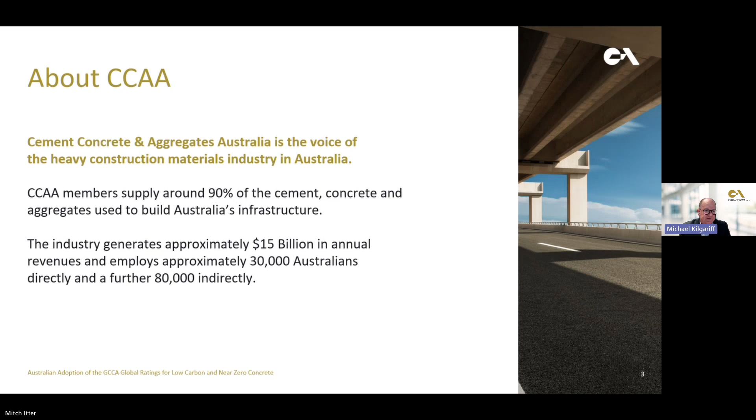So just a quick overview of our members. Of course, many of you would know the foundation members of CCAA. However, we have a number of other members that many of you would also be familiar with, largely covering about 90% of the industry in Australia. So at this point, I'd like to hand over to Di to undertake the formal launch of the Australian Adoption Guide.

Thank you, Michael. It's a pleasure to be here today. We're delighted to officially launch the Australian adoption of the GCCA Global Ratings for Low Carbon and Near Zero Concrete. We have released a guide today. It'll be available on our website immediately following the launch. And we thank you for all participating on this important day. This represents an industry-led step supporting Australia's transition to low carbon construction and net zero by 2050.

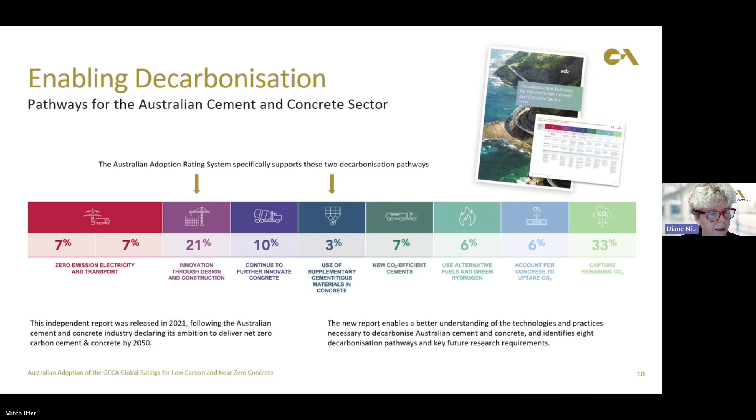This is an important enabling system for our Pathways report, which Michael talked about earlier. It was released in 2021. It was developed with the Cement Industry Federation, ourselves, and also through support by SmartCrete CRC and RACE for 2030 CRC. And we acknowledge and thank them for their involvement. There are 8 pathways in our roadmap, and this one actually relates to the design and construction pathway, and also the use of supplementary cementitious materials, which is, of course, a key enabler and critical to manufacturing lower carbon concretes.

Then late in 2024, we further expanded on that Pathways report by co-releasing with CIF an industry decarb facilitation plan. I would encourage anybody who hasn't had the opportunity to review that facilitation plan in detail to find that on our website, because it gives a really good explanation of how the pathways can be enabled and implemented in the market in practical ways.

The industry objectives there, the area of focus. Of course, this all relates to making the procurement of lower carbon concretes simpler, easier, and more transparent. And we look forward to the rating system being implemented and applied in the Australian market in the coming months. And we will continue to work with all our demand stakeholders there. So it's a great enabling tool for the low carbon concretes, which everybody knows are currently available and will continue to be available into the future.

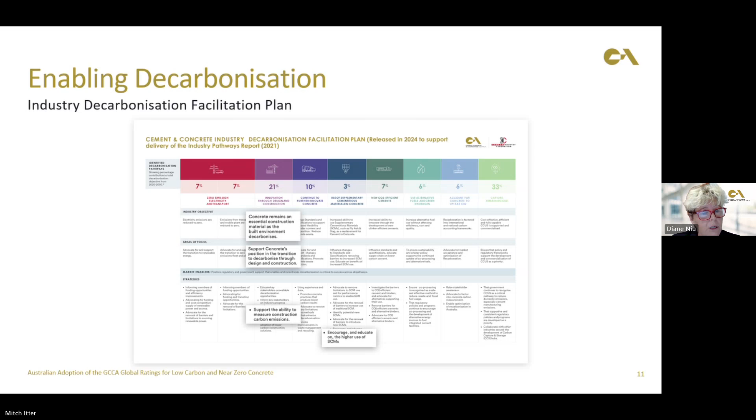So the purpose, why we've done this, what are these designed to achieve, is to support low carbon procurement, facilitate environmental reporting, and enable fair product comparison. I'm going to pick up those 3 points on the next slide, and they're not in bold, but maybe it should be, because it's also designed to overcome the problem of lots of different low carbon definitions. Essentially, we foresaw a proliferation of low carbon definitions that was just going to confuse the marketplace.

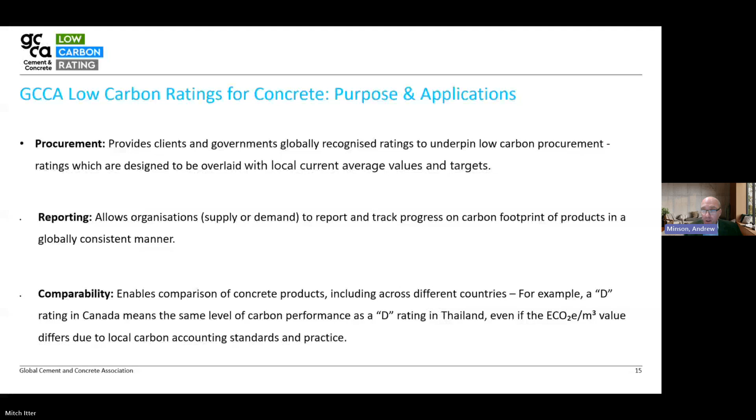But for those countries where the transformation is required, our rating system actually is like a Babel fish, if you know that; it actually translates it. So a D in Canada will be a D in Thailand, even though they use completely different EPD systems. And so that comparability is proving quite useful to clients, contractors who are operating globally, and enabling governments to compare what they're doing.

Those 3 points are picked up on the next slide, Mitch. And in addition to those 3 points on the far left, there just is a communication. The marketing and the promotion is a fourth reason to have this. That's what these ratings facilitate. And you can see some of the graphics we've got. And I'll come back to talking about our ratings in a bit more detail right at the end.

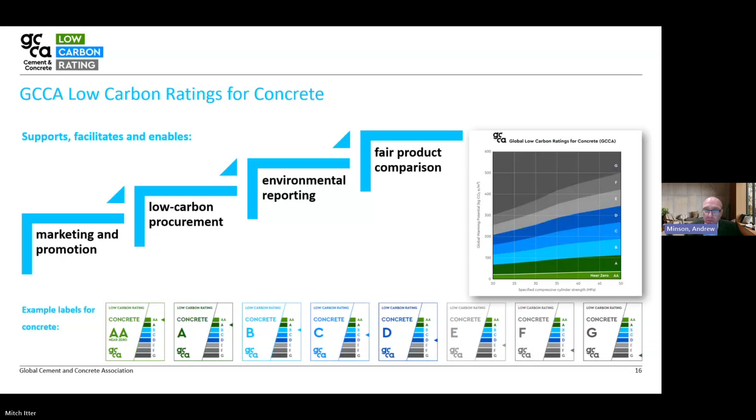On the right-hand side, we've got example labels at the bottom. And countries are completely at their discretion whether they use those or not, but we provide them if they want to be used. We'll come back to the ratings themselves, but first of all, I just want to talk a little bit about the process of how we've got to these ratings.

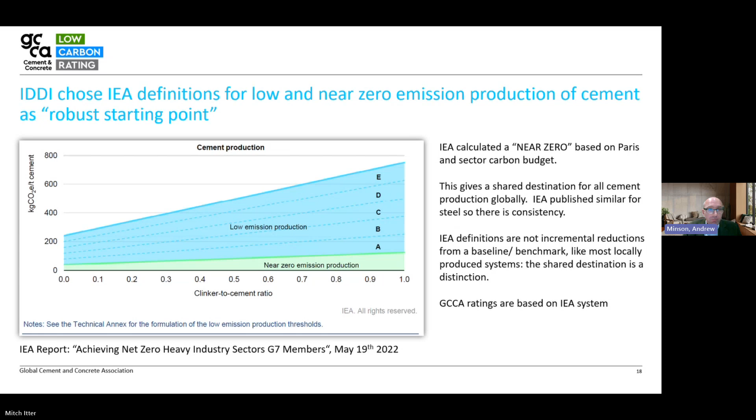It may be in the Australian market an obvious thing, but elsewhere in the globe, that's not necessarily an obvious thing. And so we're very pleased that we've been able to deliver something using EPDs that have got a track record of that credibility and transparency.

Earlier, I mentioned this balance between global and local. So it's a global system. It meets the needs of governments, international companies, and those who relate to international companies. And then there's this local aspect. So local, and Di's mentioned it. You can change the horizontal axis to be whatever strengths you typically use. If you use cube strength rather than cylinder strength, you've got the ability to set targets and thresholds in procurement.

And finally, there's this point about, we were very aware that at country level, state level, even local level, various schemes were emerging in terms of ratings. And that was obviously problematic. And so therefore we can develop the consistency through our ratings.

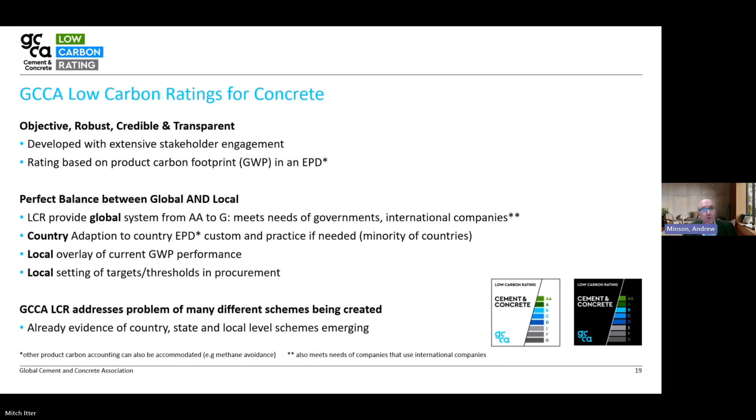So if we go on to the next slide, I've got 2 slides here on progress. We've got government adoption, private sector adoption, and then finally on the next slide, we're going to come on to standards. In terms of government adoption, we work very much with these multilateral forums. I've already introduced you to one. There's half a dozen others, would you believe, that we're working with to enable governments at that multilateral level to understand what these ratings are. And many of those organizations are calling for harmonization because these governments want to be able to do things consistently with their counterparts.

In terms of national associations, the first one that launched was way back in February now. Germany, the VDZ, the Cement Association there, launched their cement carbon class. And I'll just have one slide on that right at the end, just to mention what the cement ratings are.

In terms of the private sector adoption, the early adoption, just quickly on this. Concrete Zero, you may have heard of them. They've recognized it. We're working with the First Movers Coalition. The Concrete Sustainability Council is that 3rd bullet point. We're doing a pilot with them at the moment in LATAM, and that's going to be launched in January. The ICI is a German development agency. They've got a BEAT assessment method, that's building energy assessment tool, and they're using our rating system embedded in that. And we're in discussions with LEED. I know you've got your Australian Green Building Council system.

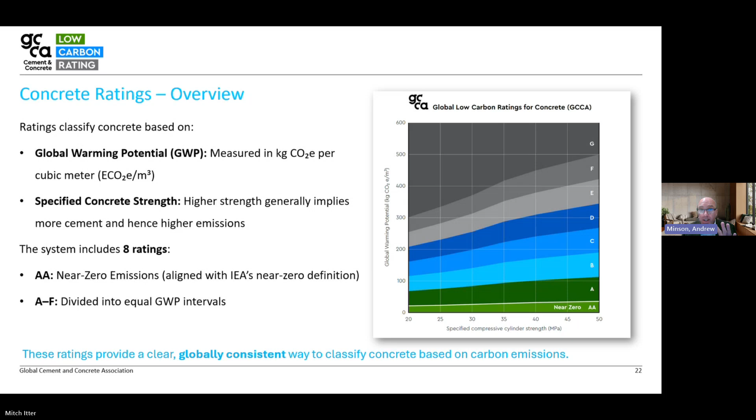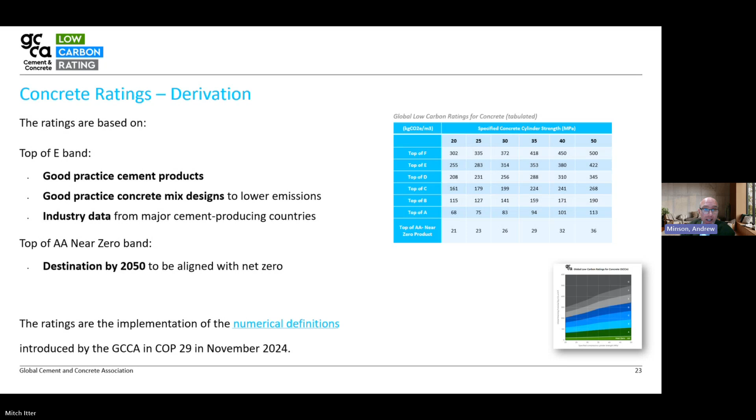Now, if you go on to the next slide, I won't go through the detail here, but if we just look at the top of the AA band at the bottom, the destination of 2050, it's aligned with net zero. I haven't got time here to explain how we've done that, but you can see at the bottom there, we launched these as definitions in 2024, and we've got all of that available on our website that you can read in detail if you want to look at how that's been derived.

Mitch, only 2 more slides to go.

I just want to mention the cement carbon class. So we've got these concrete ratings you've seen. We've also got cement ratings, and the German government and the German Cement Association, VDZ, they developed, would you believe, completely in parallel, but fully aligned, the identical system that we had come up with. And so this is the first which has been implemented, which fully aligns with us.

And even my 1 year of German at high school in Brisbane makes me realize that klimafreundlich is climate friendly. So what they're saying in Germany is they aren't using the E and the F. They have determined that ABCD and the near zero count as climate friendly. And so this highlights the point that the ratings are static over time and static over space, but the target and what's defined as low carbon varies. So in Germany, you have to be D or better to be climate friendly.

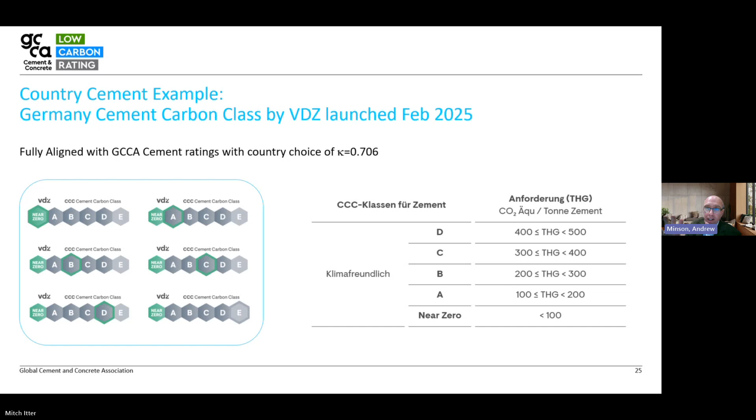And the proliferation of concrete ratings, where concrete's even more local than cement, meant that in some big cities, you could have different availability of low carbon concretes in the north and the south, and you'd end up with different ratings changing over time, changing over space, and there being a proliferation and confusion for everyone in the value chain. So to have these static global ratings constant over time gives that consistency.

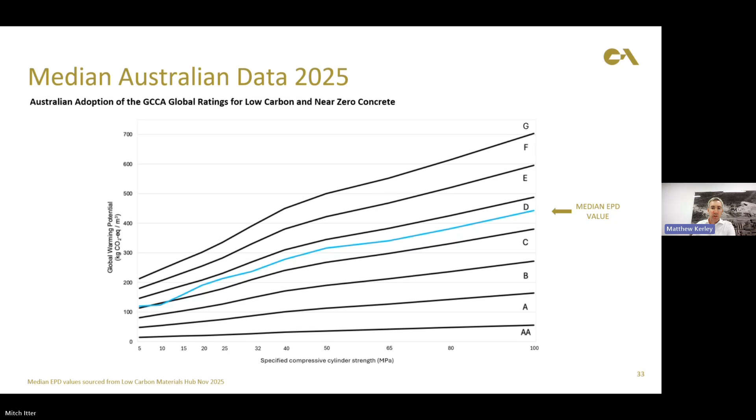So that's how we arrived at the curves, and then obviously there it is again in the graphs and the table, and yeah, I would direct anyone using it to use the table values, right? The graphs are great, but use the table. There's the numbers directly.

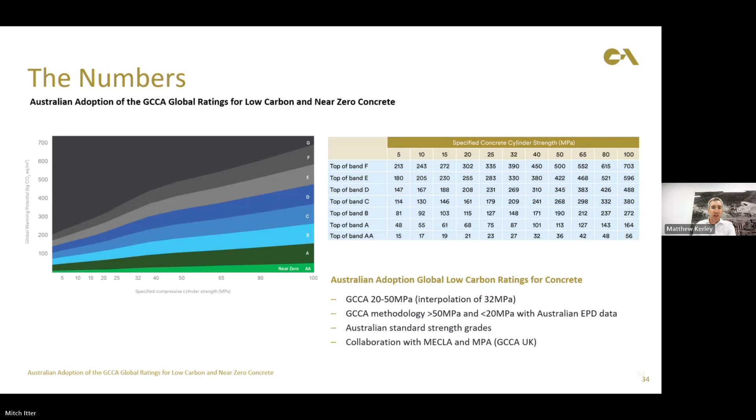The only other thing I would say, and it has been touched on before, is the aim here is this is the basis for reporting and procurement, and it's the first step, right? Getting a consistent language is sort of the first step. So excited to see where this goes and where we take it from here.

But really, it's designed for use with third-party verified EPD data, and again, Andrew mentioned it, but it's scope A1 to A3 when we're looking at those charts. That's what we're looking at. And the EPD data, we want it compliant with Eco Platform verification guidelines, just so we're doing like for like as much as possible. We've got a consistent way of measuring this.

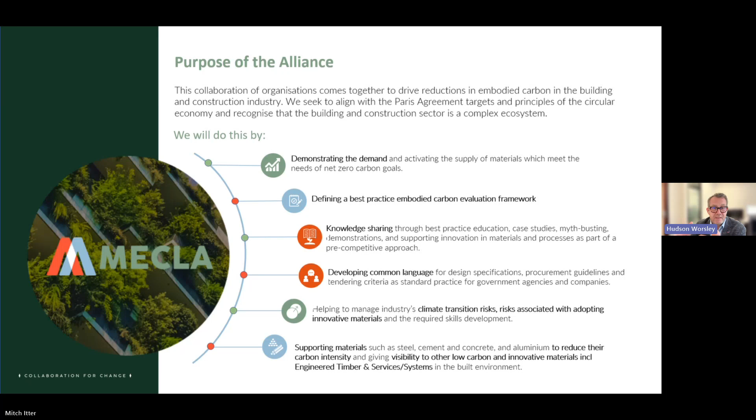But by bringing the construction ecosystem together, which MECLA's been doing since 2020, we enable conversations so that people, whether they're in procurement or design or engineering, or even concrete placers in this case, understand what this low emission thing is about, and having those conversations before projects start is a really good way of building up the demand and the understanding.

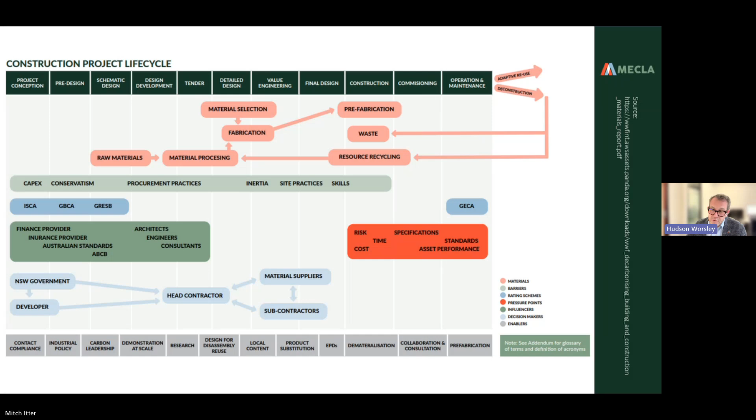Next slide will show that we also look at A1 to A3, but then having a broader view, we extend that into construction and use and end of life. Got to get A1 to A3 in line before we move on, but life doesn't stop there.

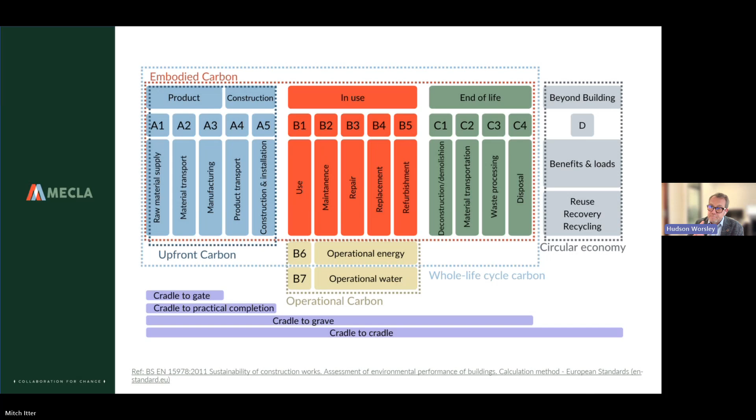So MECLA has the longer term view as well, and would encourage anybody to dive into the MECLA resources. Our next slide shows who's involved. When we set out to set up MECLA with WWF and Climate KIC, that's the Climate Knowledge and Innovation Community, we wanted 40 members. Delighted to say that after 4 years, we have 200 or so members. Many of those are financial contributors, others are collaborators.

And this slide really shows the doing. We call MECLA a do tank, because we just get on with the barriers that are in the way of reducing emissions in construction and find ways to get stuff done. So that demand signal, that's our first group, looking at how we measure and monitor, providing guidance and clear language. And then there are the various material working groups. So yeah, the key point there is there's no one action that can reduce emissions in construction and infrastructure. But by bringing the different actors together to get stuck in, that's how MECLA works.

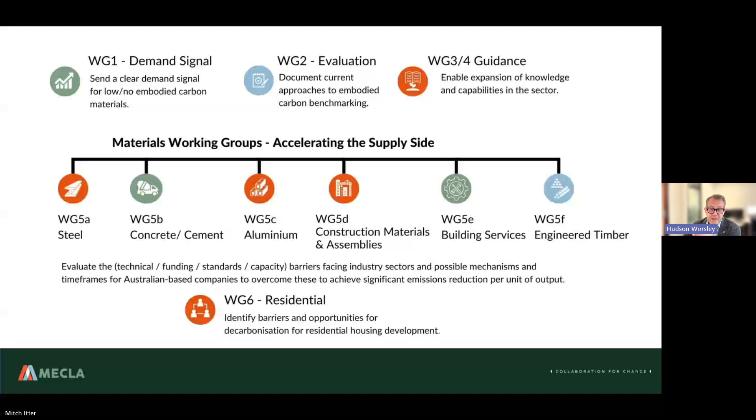The next slide just shows some of the activities that we've undertaken over the last 4 years. Lots of organisations involved. We participated in a lot of feedback sessions, providing feedback at a state and national level, and also to CCAA in this case. And that's been terrific to have that harmonisation at a local and international level. Because as you can imagine, anyone who's worked for a national or international organisation, to have different requirements at different state boundaries or different national boundaries is really something we want to avoid. And so we're delighted to participate in this harmonisation endeavour.

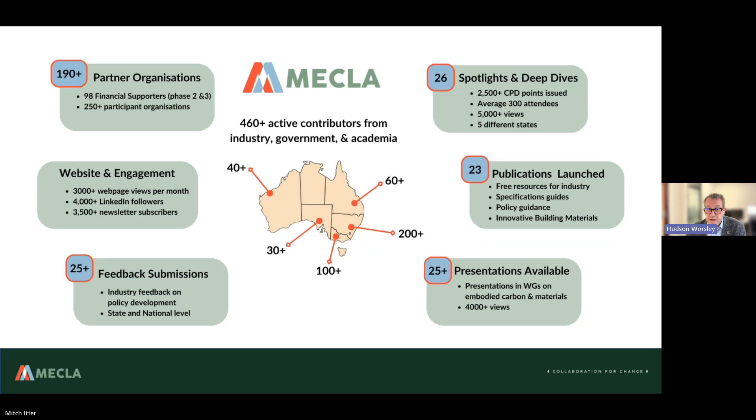All right, the next slide shows some of the outputs. We've got low carbon aluminium, as well as looking at roofing tiles, plastic pipes, aluminium, as well as our concrete. And we've got Evan Smith, who's been co-chair and one of the leading authors of our low carbon concrete guide. He'll be part of our Q&A at the end of this. But all of those links are there. I'd really encourage people to dive in.

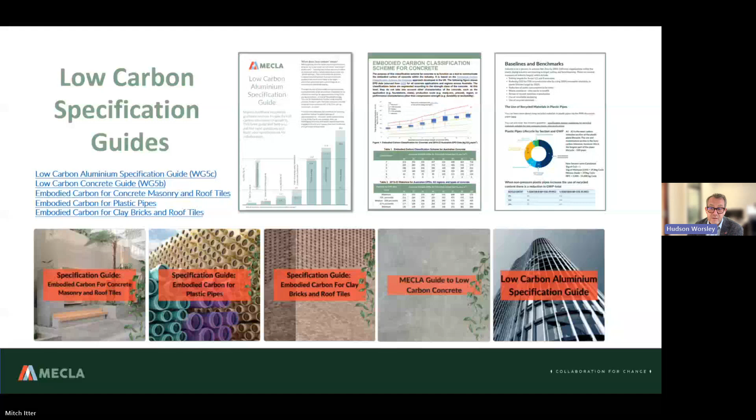And our final slide talks about the case studies, where the do tank provides cases where others have done the work to help bust myths of, I can't use that, never been done before. Chances are it has been done, and we've written it up so that others can learn from that and don't have to go through the experimentation phase themselves. Look, that's all I've got to say from a MECLA point of view. We're delighted to be supporting this alignment and harmonisation, and really encourage industry to take this up. The global challenge of emission reduction is big, but boy, the collaboration to help us get there is fantastic.

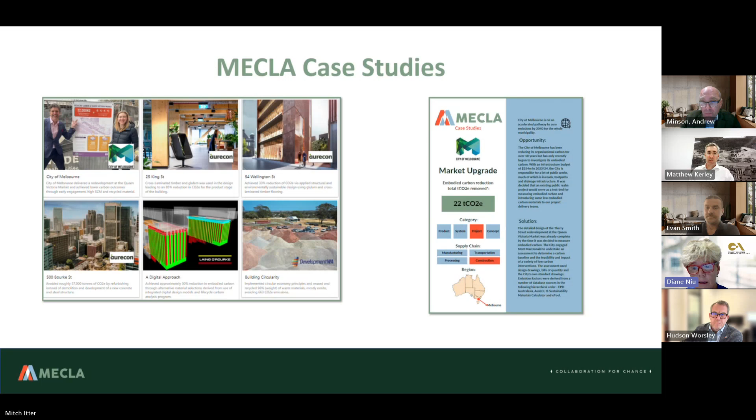CCAA is planning to continue to work collaboratively, as we have done to date with MECLA. We are planning to host more webinars in the new year around how the rating system should be applied, and we know MECLA will be adopting the data labels, tables and the graph. Could I ask Evan or Hudson to comment on the MECLA guide and your proposal to launch another one in the new year?

Yeah, I'll jump in. I guess with MECLA, it's been a bit of a long history, initially looking at what was happening in this space globally and what was available. And then when we were looking to update the data set for our first document we released, we had like 1,000 EPD data points in that as well.

By the time we got to now, we're up to about 6,000 mix designs in Australia. So we're really looking to update that and actually release that new EPD data so people have that. But we decided to hold when GCCA released that global classification. I think that's what everyone's been looking for, as Andrew was saying, a D in every country and that global consistency approach. So we're very supportive of that.

And then also, where do those lines go? So we're also very supportive of CCAA extending that and making sure of that consistency and that linkage as well. So MECLA has been very supportive of that approach. We're very keen to then show where the market is in Australia in relation to the CCAA, GCCA adaptation as well.